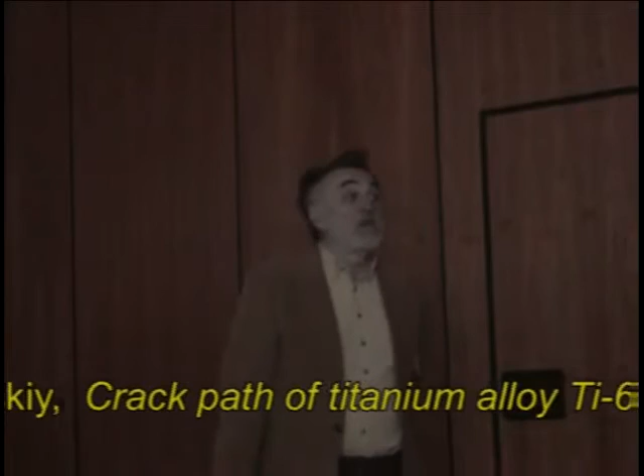I would like to show you our thinking, not about surface crack growth, but mainly about subsurface cracking material, and I will show you results of investigation for titanium alloy.

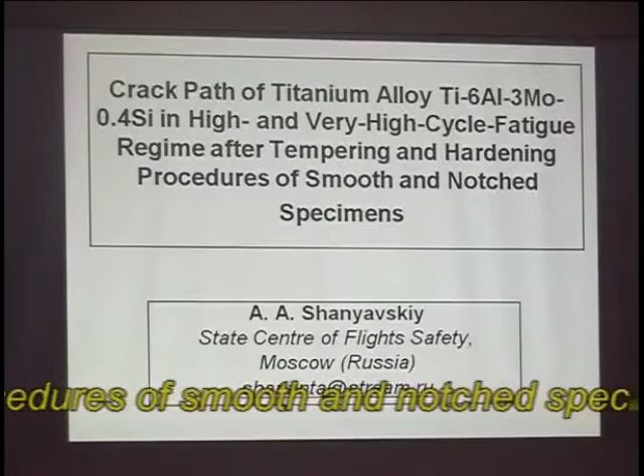First of all, I should introduce our thinking about fatigue cracking as a methodology based on the knowledge about synergetics and cascade evolution of open systems, which is metal.

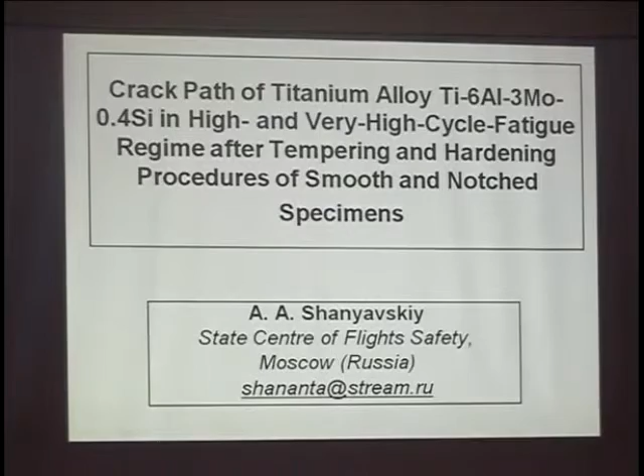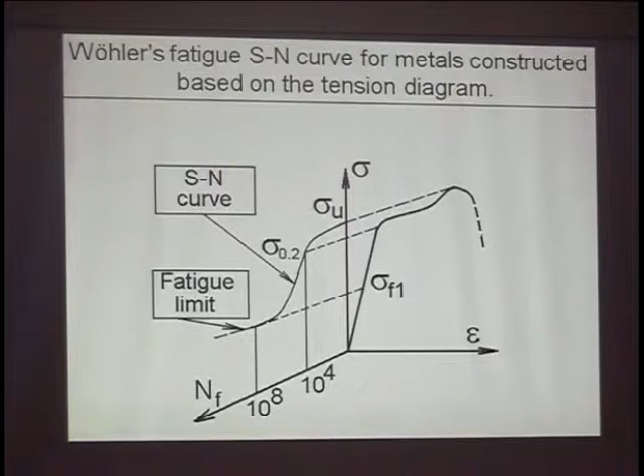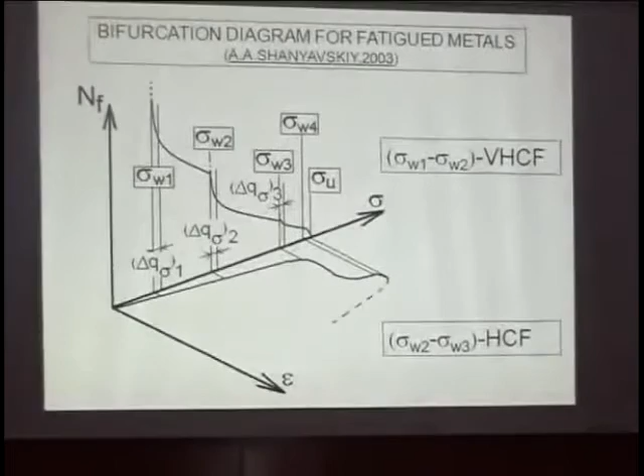It's a well-known situation, for instance the traditional S-N curve, the Wöhler curve, well known. We would like to use a bifurcation diagram for step-by-step estimation of different areas for material cracking in the regime of very high cycle fatigue, high cycle fatigue, low cycle fatigue, and quasi-static fracture. The border of transition from one region to another is a bifurcation area where two kinds of material cracking can be seen.

For instance, if you look at the transition from very high cycle fatigue to high cycle fatigue, there exists the possibility that at the same stress level, two different types of material cracking occur, at the surface and subsurface.

The main idea of my presentation will be about subsurface cracking of material. There is shown the area for very high cycle fatigue and for high cycle fatigue.

I will discuss this problem of transition, and I will show you how the well-known fatigue curve should be reorganized, because there exists not only one type of material cracking but two.

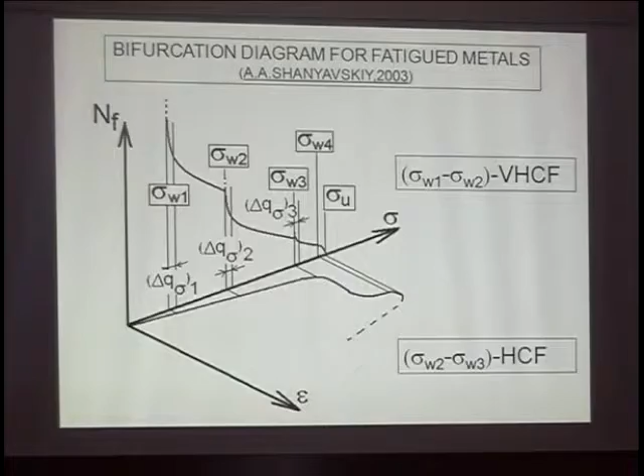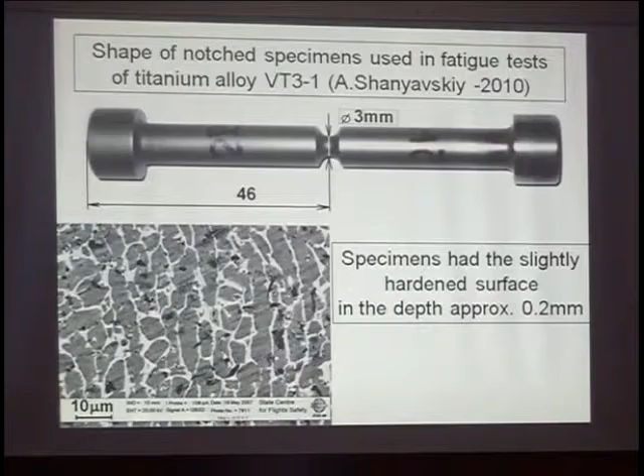First of all, I would like to introduce our knowledge about material cracking as a model. One of the specimens was investigated, a notched specimen with this material structure, property, and chemical composition.

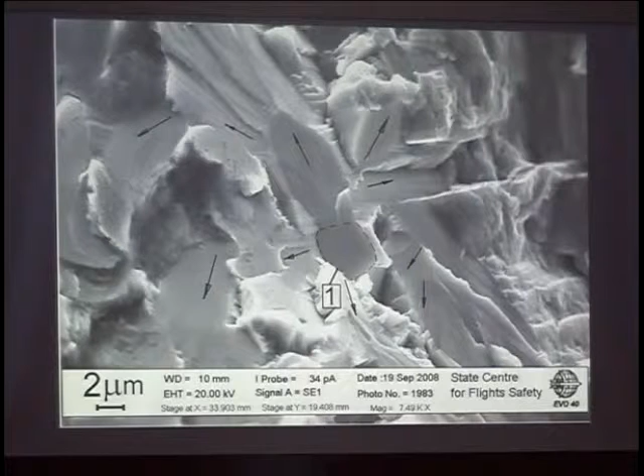Based on the acoustic emission approach and fractographic analysis, we discovered a specific area for material cracking as the origin, with a very flat surface. We think this surface forms because of twisting and compression of materials.

That's why first you can see a flat surface of weak material, and then material cracking by a quasi-cleavage manner around this facet. It's independent of the stress level, depending only on the material state that realizes this type of subsurface cracking.

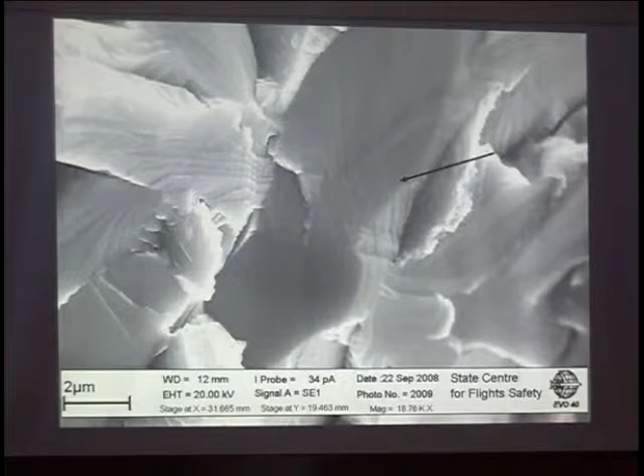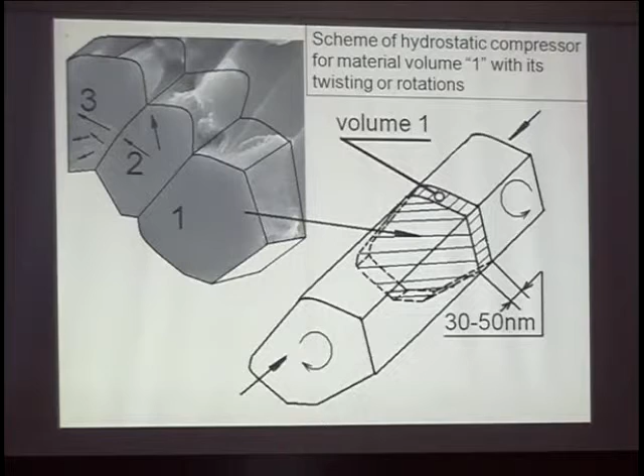So this is the mechanism, or model, for why this first step of material subsurface cracking can be seen, and this model explains material cracking because of twisting under conditions of compression and twisting action.

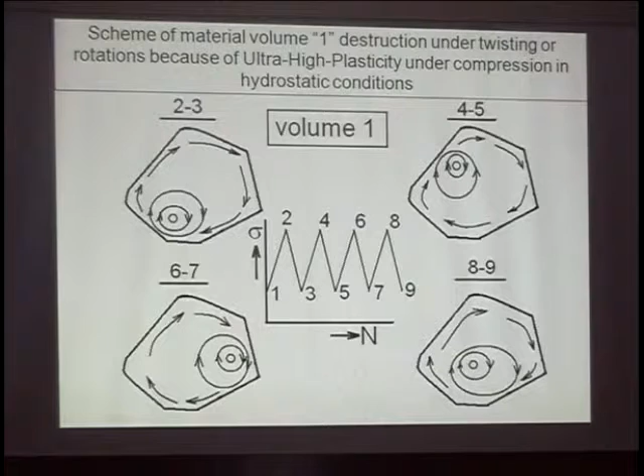But there exists only one question: what comes first? Material weakness, then plastic zone formation around this first facet, or maybe they exist simultaneously, with weakened material and plastic zone formation occurring together.

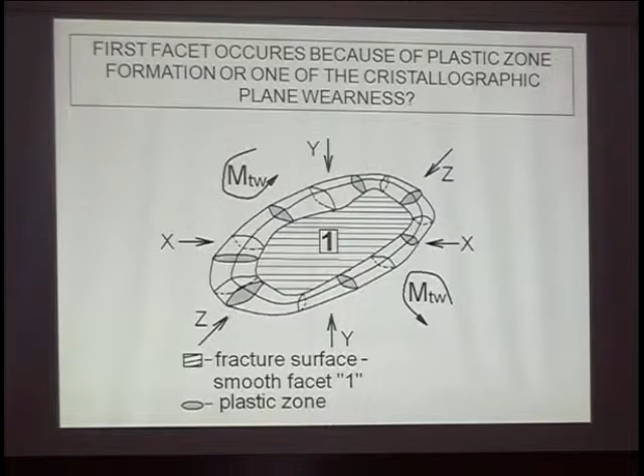We think that the plastic zone around this first facet forms after some weakening of the material. So in our model, first there is weakness at one of the facets of the material, then formation of a plastic zone of certain size, and then we can see crack propagation.

To see this manner of material cracking, we performed very different kinds of conditions for material state, especially for smooth and notched specimens, to analyze this possibility of material cracking.

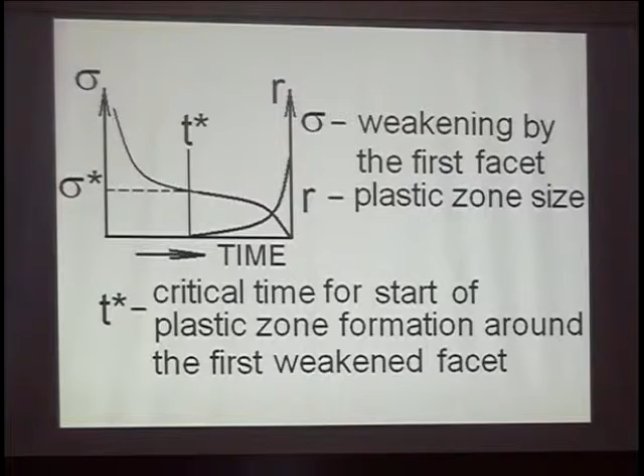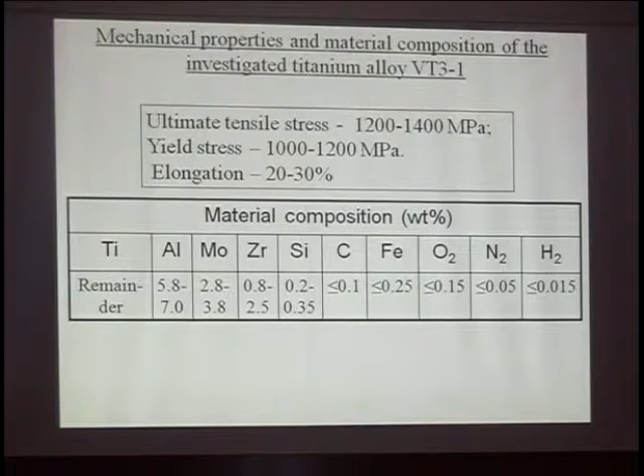So this procedure was for investigating different conditions that may influence this bifurcation transition from one area of material cracking, one manner at the surface, to another, subsurface.

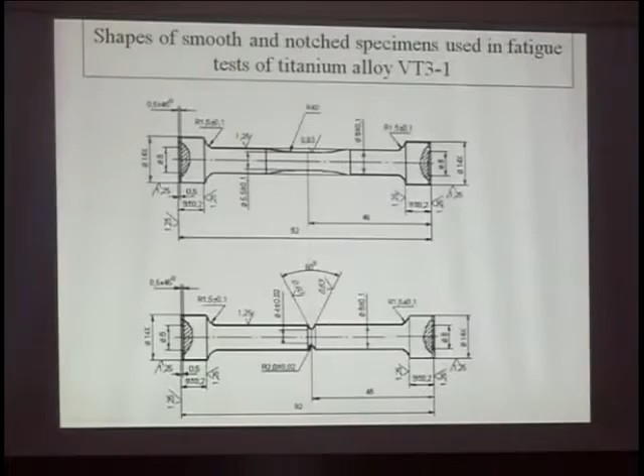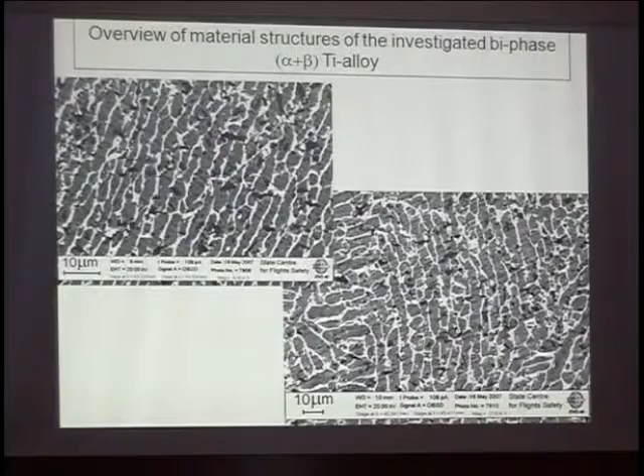Two types of specimens were used, named smooth specimens and notched specimens. There can be seen the shape parameters. This is a well-known type of bi-phase, alpha-beta for titanium alloy, with mixed lamellar and globular structures.

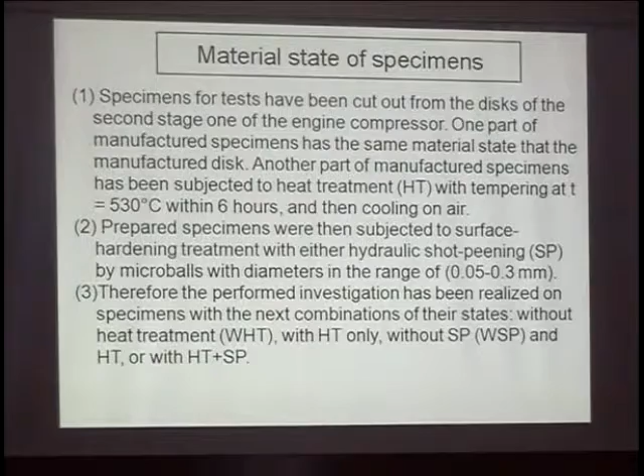All this combination were investigated to see if the same manner of subsurface material cracking that was announced on the previous slides would occur.

First of all, test investigation procedure. Some specimens in the area of bifurcation were not fractured because it was a long time of testing.

We also know that to construct an S-N curve we plotted points which show that it may be the area of fatigue limit, but it's not actually fatigue limit, it's an area of bifurcation, of transition from one manner of material cracking to another. So a special method was used to open the crack by tension, which I will show you.

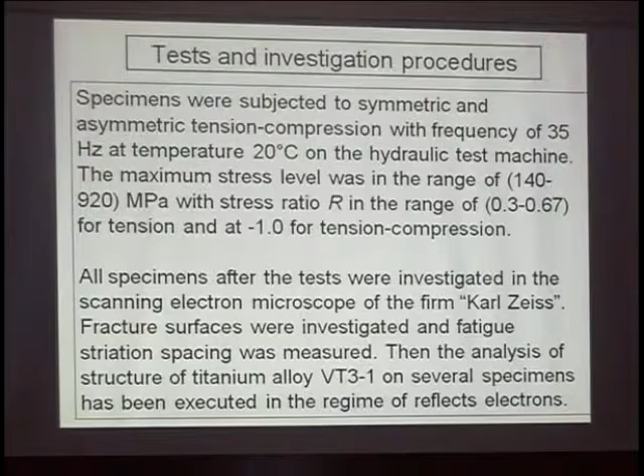All specimens were investigated by scanning electron microscopy. So after the fatigue test, we examined specimens to open the crack, if a crack existed in the specimen. I will show results of this.

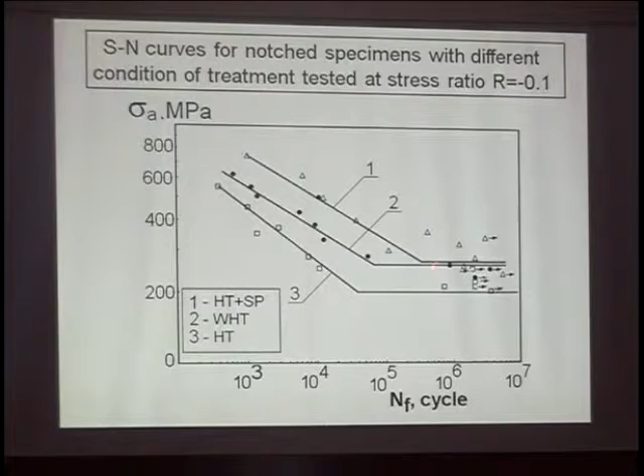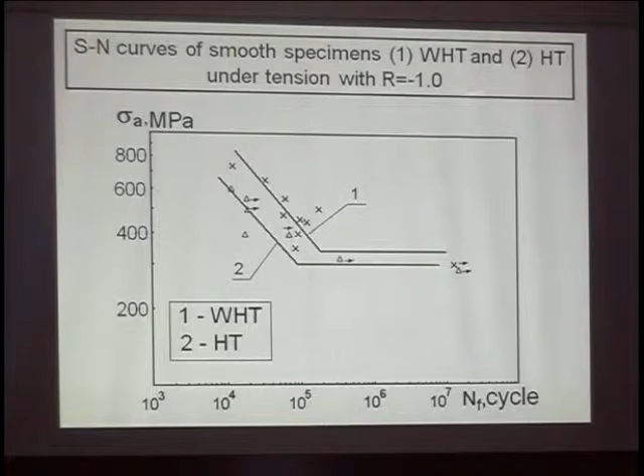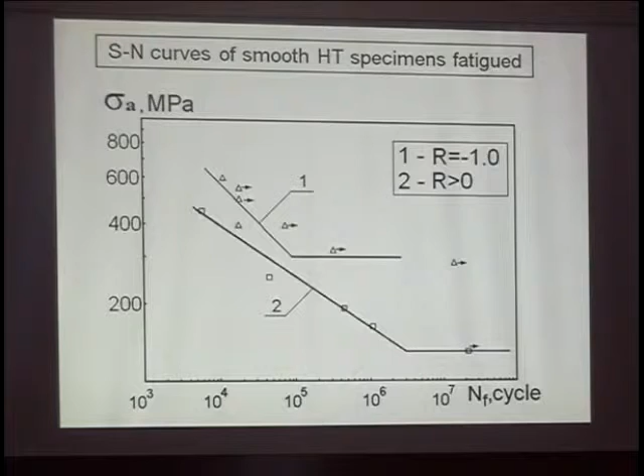Another way will also be reconstructed for another state of material, another Wöhler curve for different states, for smooth specimens for instance, and also comparing the R ratio, more than 0 and minus 1.

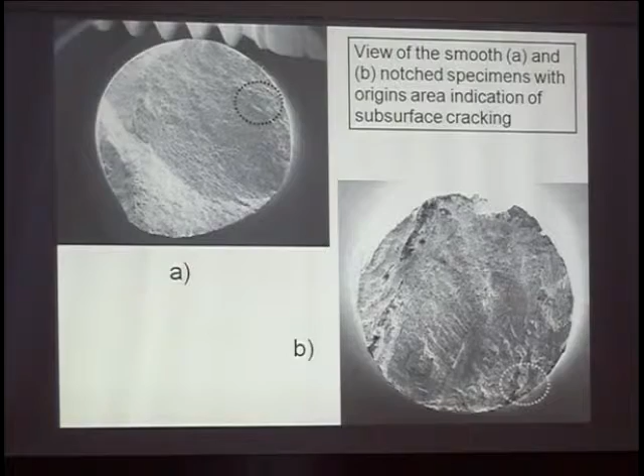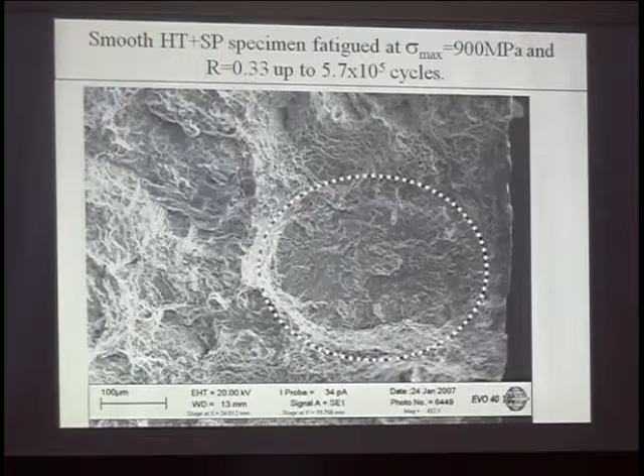But for smooth specimen, especially after shot peening, there was seen only subsurface cracking. The area of low magnification of material cracking origin placement can be seen on this slide. One example for smooth specimen, temperature shot peening, with these parameters of loading with R ratio and maximum stress. This is the area of material cracking subsurface.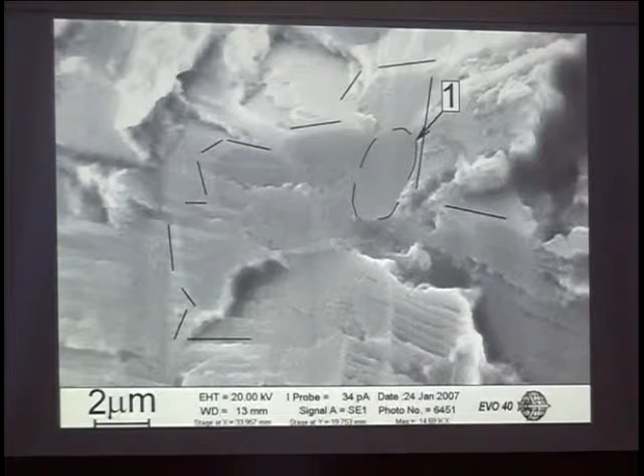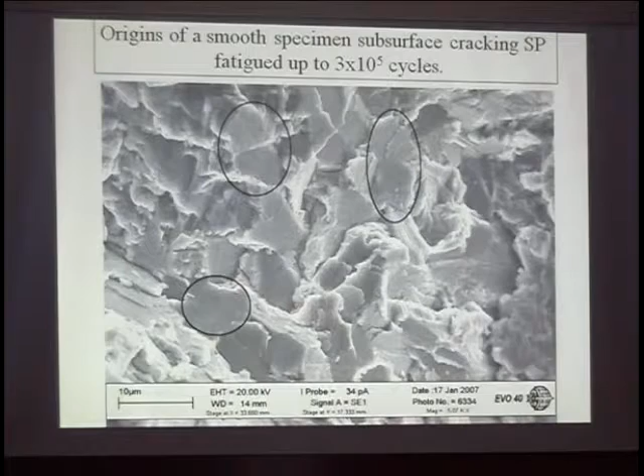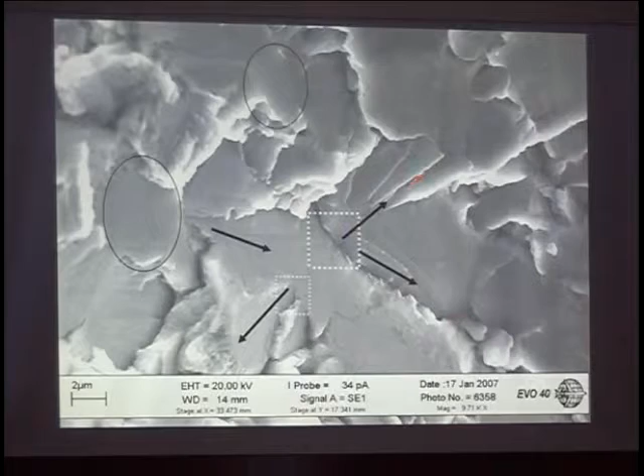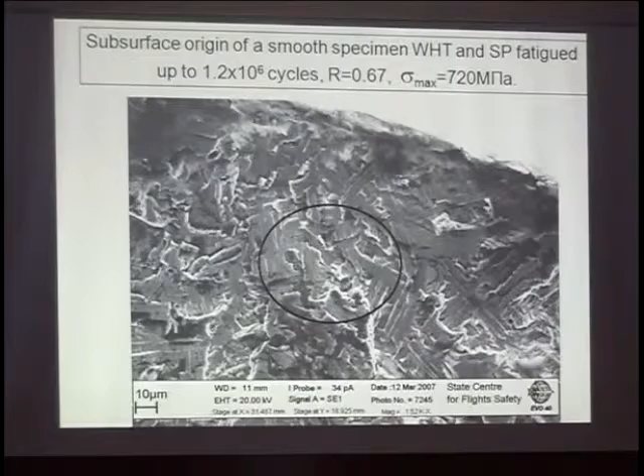The same can be seen for another situation, only shot peening. We can also see the first facet. Out of there we can see very strongly expressed evidence of material cracking out of this area. For instance, this is the place of the first smooth facet, and then you can see clearly pronounced material cracking in a different direction around it. The situation is not very clear for the faceted pattern because of the lamellar structure, but if we look at it in high magnification, we can also see an area with a very, very clear smooth facet from which can be seen the start of the material cracking surface.

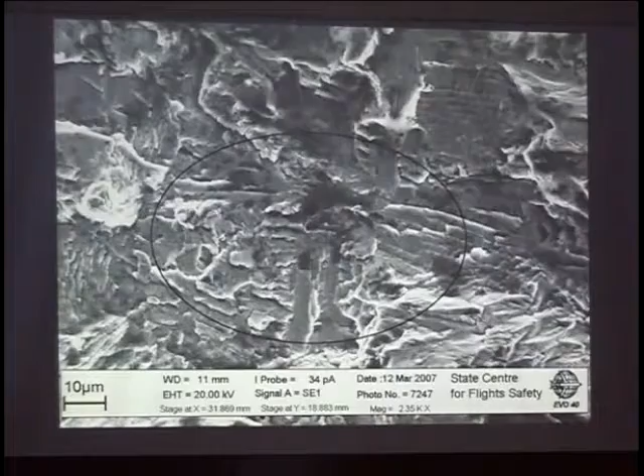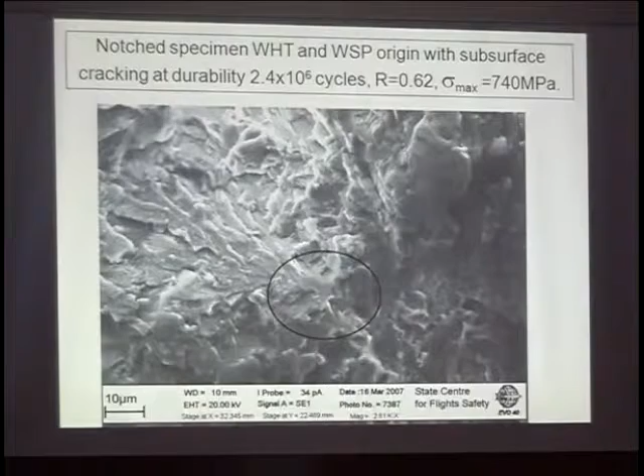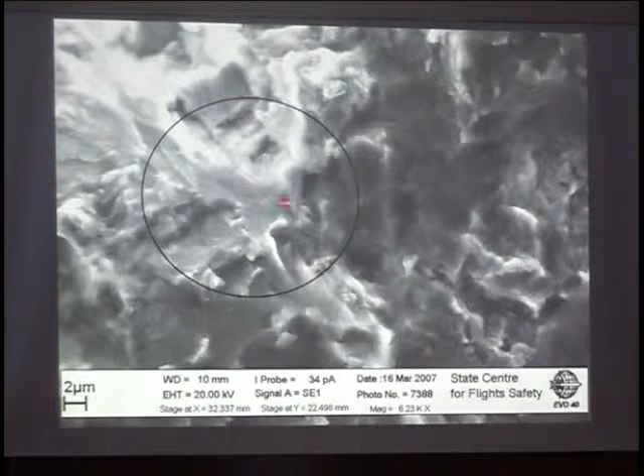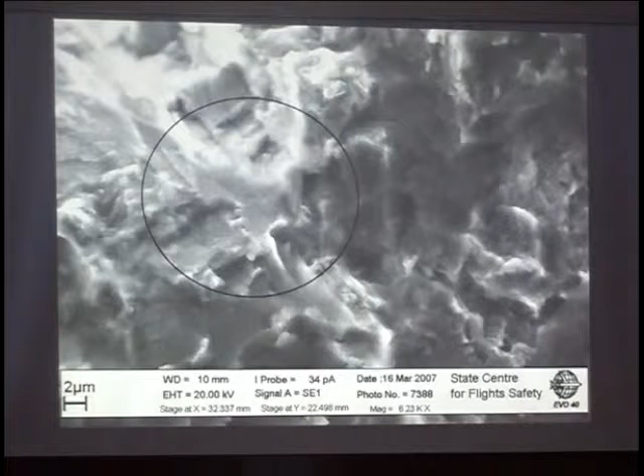For notched specimen, also very clear: first of all, a facet of weakened material. Out of this facet can be seen very strongly expressed material cracking out of this area. At higher magnification, you can see really that it's a very, very smooth facet, but around this, specific material cracking occurs because it was material that had been used for specimen manufacturing from the discs prepared by the well-known technology used to prepare discs in aircraft engines.

First of all, I would like to summarize the results of the investigation. There is always a dramatic change in the bifurcation area from one manner to another, independently of notched or smooth specimen. There would exist a first facet with different size because of the difference in external stress level used to test the material, but the same manner of material cracking, independently of stress level or stress ratio, and independently of the tempering procedure or surface hardening procedure.

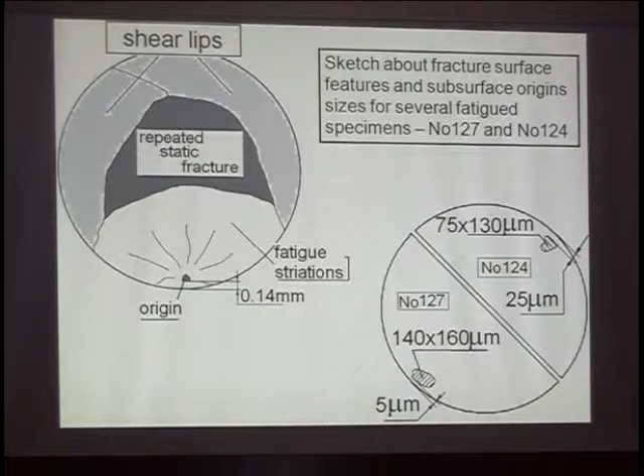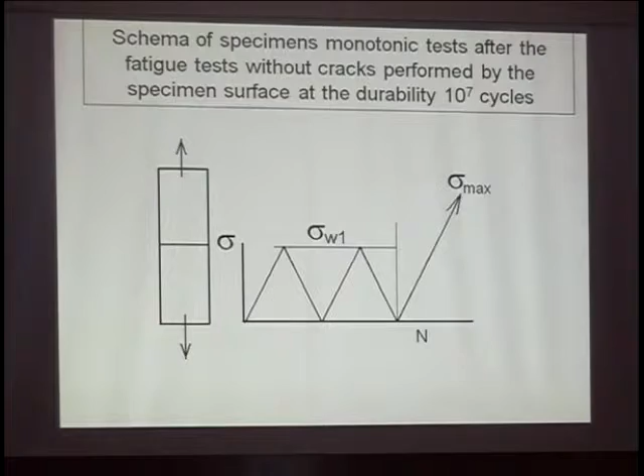Very interesting for me, first of all. I think it will be interesting for you to hear the results about opening the crack for specimens that had not failed during the test, and we tried to see if there really inside the material exists an area for predominantly material cracking or origination. You can see that it was so.

So it should be clear that for all tests where we stop our test to determine fatigue limit, it will be questioned whether it's really the same manner of material cracking that we think. Maybe if there had been some more cycles, it would not be origination crack at the surface, but subsurface. So it would not be the point which indicates fatigue limit — it's a point about our incomplete knowledge of the material's manner of cracking.

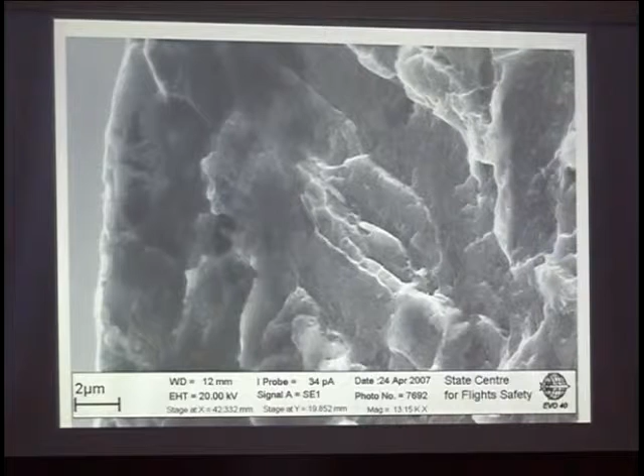That's why, based on this thinking, we reorganized all the fatigue curves that had been announced on the previous slides. For instance, this curve: this area is not the area for material cracking at the surface, this area is for cracking subsurface. So it should be clear.

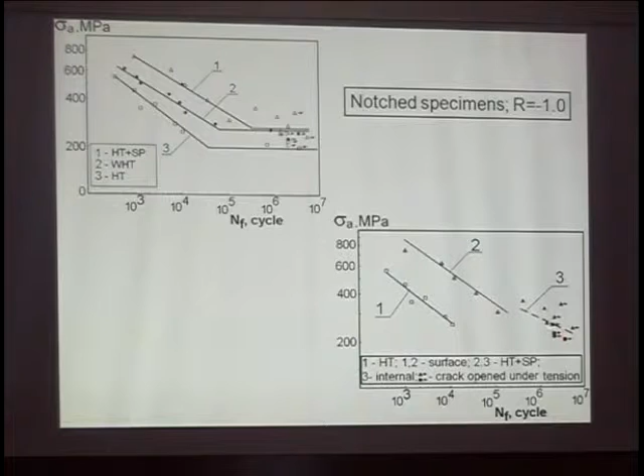Realize that it's not just one or two curves, for instance, for this database. There is a curve which reflects material cracking at the surface, and another one which reflects material cracking subsurface. The same results can be shown at high magnification and for another set of parameters, as in the curve for HT plus SP, high temperature tempered material and surface hardened. The same: this is a fatigue curve that had been used to estimate fatigue limit, but in reality these test results show us that there is subsurface cracking.

So it's not the same fatigue curve — there exist two fatigue curves, and that's why, in my opinion, the results of fatigue tests should now be differentiated. Because if we think about fatigue limit, we should not stop our test. If we stop our test, we should open it, if possible, to see if material cracking exists inside. If not, we should consider that the results of investigation may need to be used to construct one kinetic curve, or maybe another, because of subsurface material cracking.

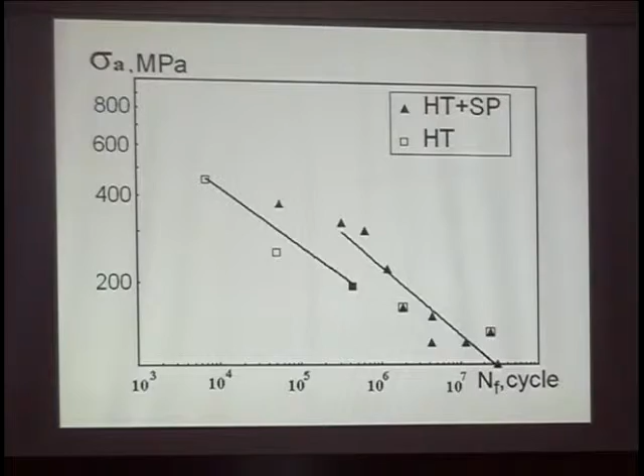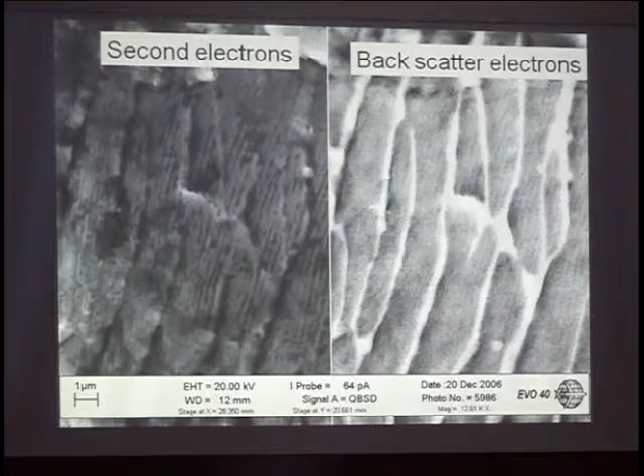There exists a lamellar structure that this slide presents. We measured striations on the second stage of material cracking. There is an example for measurements, explanation of the type of specimen, very clear striations, crack growth in this direction, and dependence between striation spacing, the crack growth length, and the number of cycles reproduced from the measurements of striation number.

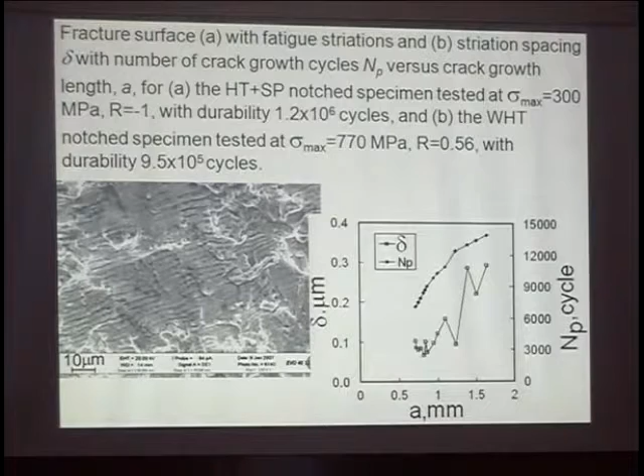There is a very clear master curve, a basic curve, a fine description that can be used for all combinations of R ratio, material state condition, and surface state, smooth or not, not just for one specimen. There is NP, crack growth, the number of cycles for crack growth in terms of striation measurements, and Nf, durability of the specimen. We can see a strongly expressed unified dependence, with small deviation, between this ratio and the durability of specimen for all combinations of material state used.

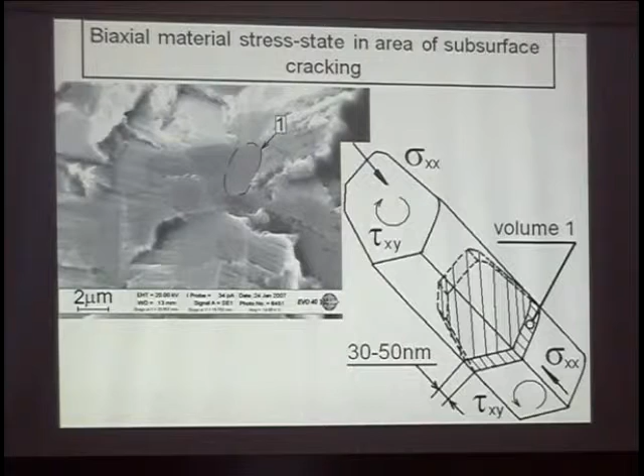We used, first of all, a model that, in my opinion, is very simple and very clear, estimating material cracking if it will be slow crack growth rate, and it will be clear that between crack growth rate and crack length there exists a linear dependence.

If a small part of this circular crack front is extracted and a strip model is considered, it will be clear that crack extension can be described because of some force acting and moving this crack in this direction, from one point to another.

Then it can be considered a very clear relation for energy of material cracking, and if we consider that there exists not only strip moving but material cracking, we will see that it can be converted into this simple ratio where the CF coefficient can be described by this well-known formula.

It's approximately the same as classically introduced, for instance. But the difference is because there exists sigma E. Sigma E is equivalent stress, because for material cracking, for strip moving, it doesn't matter what kind of external loading has been realized, because only the crack extension is considered in this model.

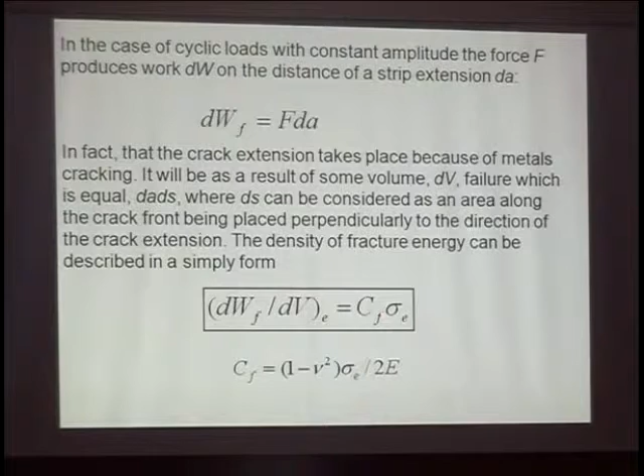We now only try to explain if these different parameters, which can be seen because of the model, explain material cracking subsurface because of twisting. It should be introduced as tau value, and sigma, because there is compression, and sometimes later it should be an open crack, because a crack can propagate only because of the opening process. For the first step, we estimate values which combine.

It should be converted because tau is less than sigma. It's not, so another value should be introduced. Using the Murakami equation, we compare this ratio, and we can see that between sigma and tau there exist very good ratios that were known for the material.

It's not finished, our thinking about the possibility to estimate this sigma E because of tau and X values, but I think if there will be more experimental results and investigation in the future, and a database, it will be introduced as a model. But it should be clear that subsurface there exists not only one but several origins.

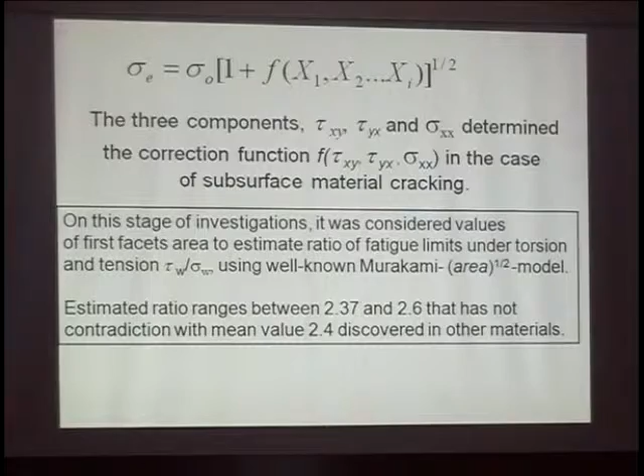So it should be introduced as a summarizing case for estimation of material cracking subsurface. For titanium alloy there may exist 3, 4, or 5 origins with approximately the same area. That's why knowledge about the summarizing manner of summarizing area subsurface for material cracking should also be introduced.

So there is a conclusion that exists. First of all, we can see that the investigation has shown that really, in the area well known as the area of the fatigue limit, in reality it's a bifurcation area for transition from one manner to another. It should be exactly estimated whether it is material cracking or the manner for crack origination.

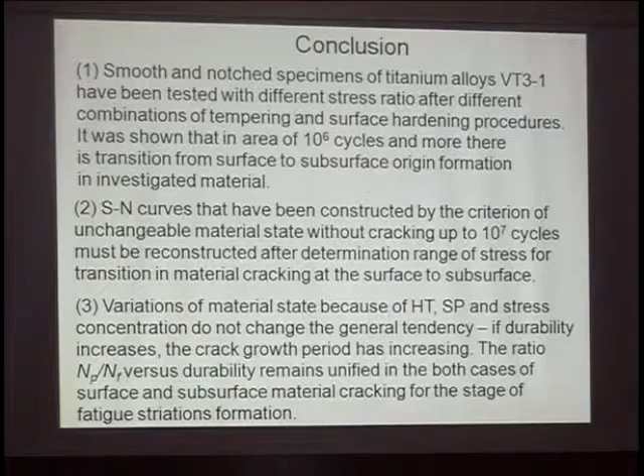And it is clear that there exists a unified description between this ratio and the durability for material, independent from the material state and the surface, whether it's smooth or not.

There exists a ratio, very clear, that can be used for estimating crack origination using area for material subsurface, but it should be clear that, as I've just said, it's not only one origin, there are several origins. This idea should be introduced for estimation of the value of stress and the combination between shearing, twisting, and tension of material subsurface to account for crack origination.

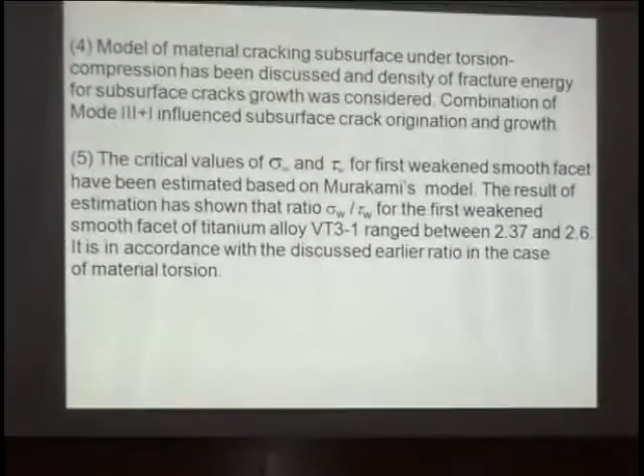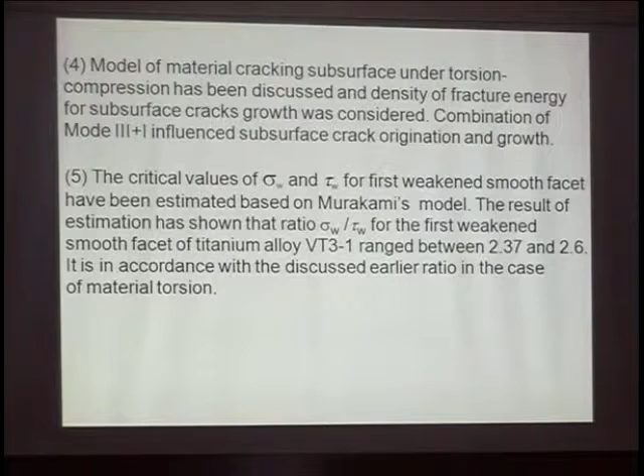You have used a notch specimen with a notch tip radius, an absolute radius equal to 2 millimeters. If I use a notch radius equal to 1 millimeter, or for example 0.5 millimeter, is it possible to have a subsurface crack? Thank you very much, absolutely right. It depends only on the level of external stress at which this transition will be seen. For lower radius, it will be a lower level of stress where this transition occurs, but it will always happen. This transition is independent from the material state and surface. It depends on the possibility to realize one of the manners of material cracking.

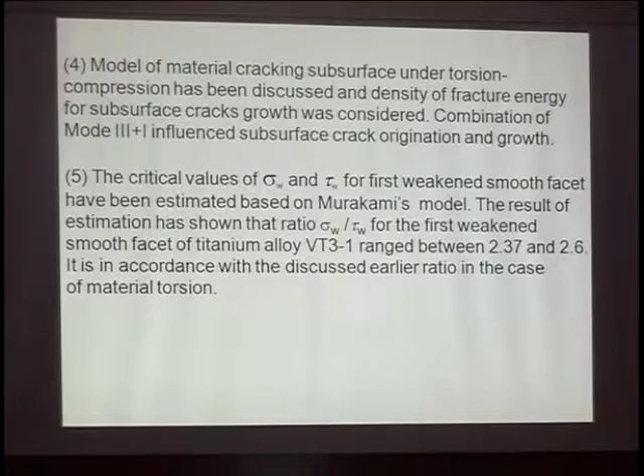Can you explain in a bit more detail how you recalculated the S-N curves that you showed us for the notched specimen and smooth specimen? Thank you very much for the question. We did not recalculate, we reorganized. We did reorganization.

If we only have knowledge about the experiment, it's well-known tradition: we have stress, we have number of cycles, and that's enough. But in this area, we use only knowledge about the number of cycles before failure. So we should know if failure will occur by this manner at the surface for a long number of cycles, or not. If we have specimens, we can open them and see if there's surface evidence of material cracking. I should use this point, not for this diagram, but only for this other diagram. But it doesn't always work, because sometimes we open without result, we cannot see anything. Okay, we can discuss that.

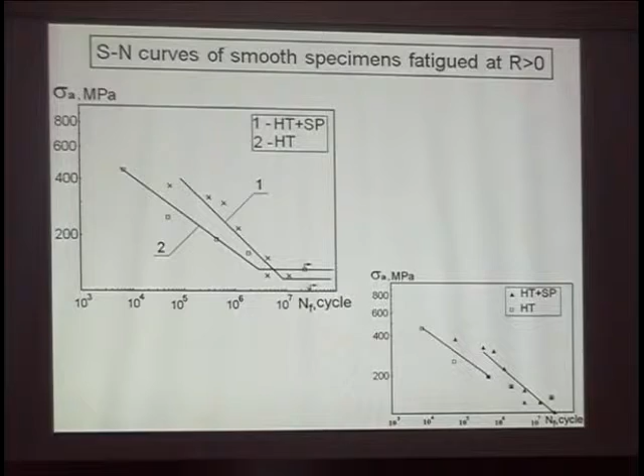It's not mysterious from a physics point of view. As a mechanician, I would call it initiation. If I understood your question correctly - sorry, let me answer the first part. This curve was constructed for practice, because during my work in further analysis, I needed to understand if I could use the crack growth period, which can be easily estimated from the fracture surface by measuring fatigue striation spacing, to predict how long the surface had been cracking. Yes, it really depends on the material state.